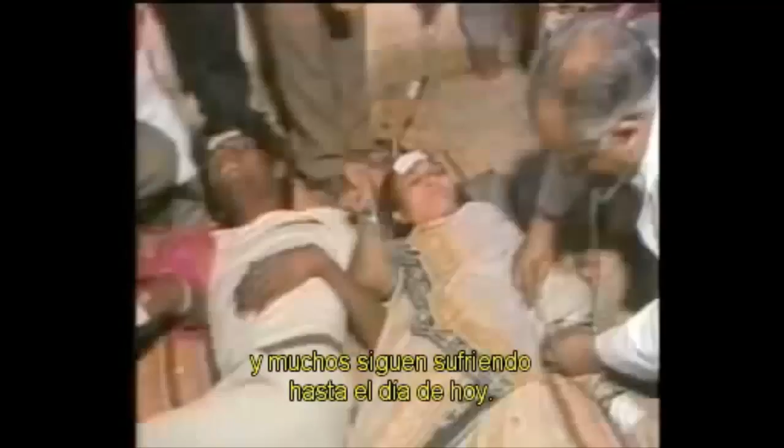Dennis Hendershot is an industry consultant in chemical process safety and has toured the now abandoned Bhopal accident site. Water got into the storage tank somehow. Water reacted with the methyl isocyanate, causing the release, which killed thousands of people. Thousands more died in the aftermath of Bhopal, and tens of thousands continue to suffer today.

But Bhopal also brought about change. Bhopal totally changed the understanding of potential process safety hazards in the chemical industry. Bhopal spurred Congress to require new OSHA and EPA regulations covering chemical process safety. And Congress established the CSB to independently investigate chemical accidents. There have been many positive changes in chemical industry process safety since 1984, when the Bhopal nightmare occurred.

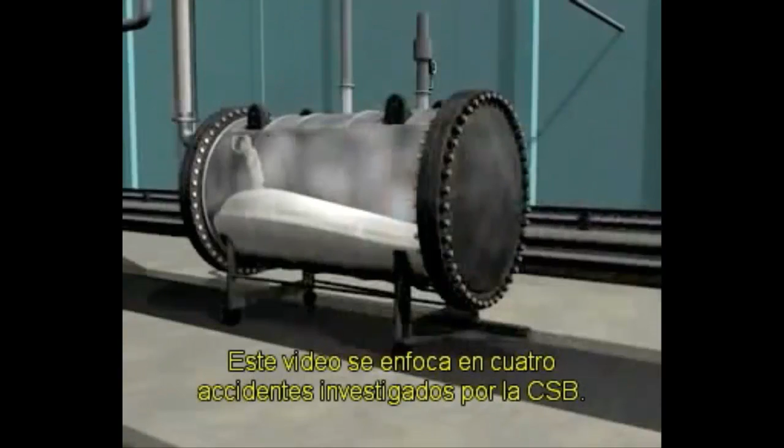But the CSB has found that accidents involving reactive chemicals still occur all too frequently and often with tragic results. This video focuses on 4 major accidents investigated by the CSB, accidents that demonstrate what happens when reactions run out of control, resulting in fires, explosions, and toxic releases that cause death, injury, and environmental damage.

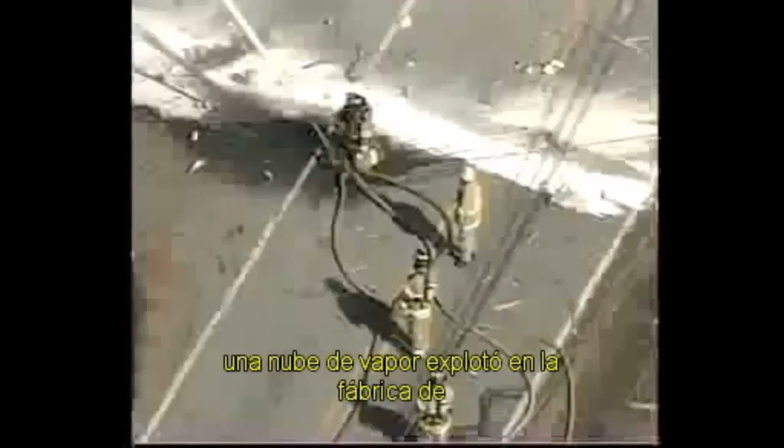Such an accident unfolded on the morning of January 31, 2006, when a vapor cloud exploded at the Synthron acrylic polymer manufacturing plant in Morganton, North Carolina. The blast killed 1 worker and injured 14 others. It destroyed the facility and damaged nearby structures. At Synthron, a seemingly minor increase in the size of a production batch led to a catastrophic explosion. It was a tragic example of what happens when process changes are not managed carefully.

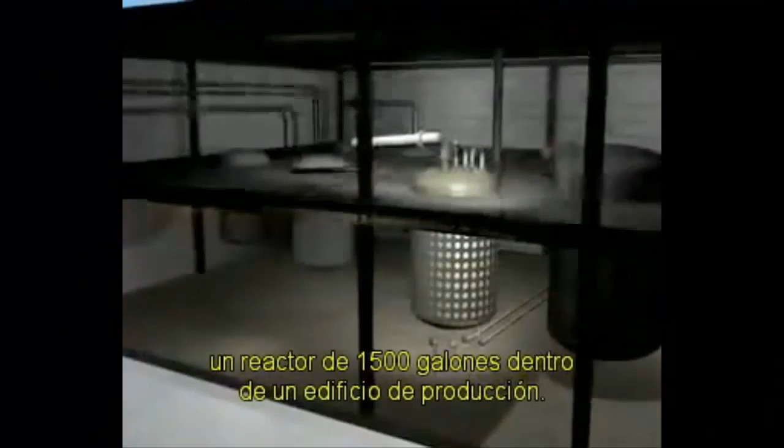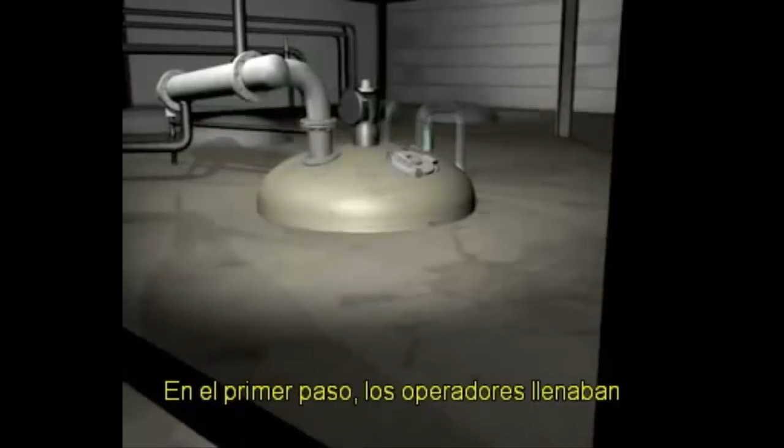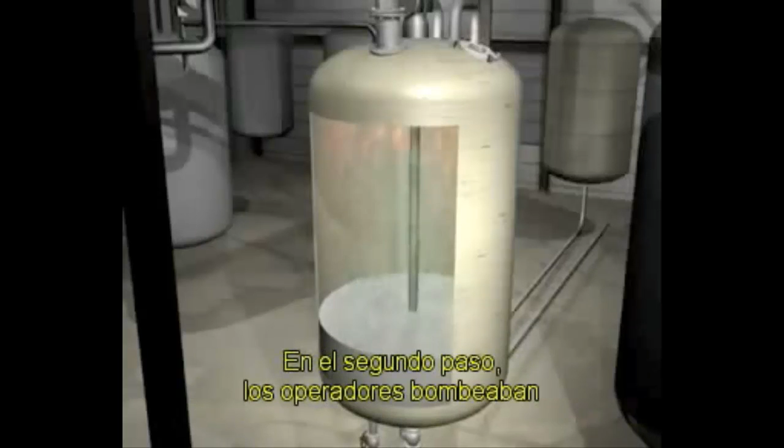Synthron manufactured acrylic polymer coating additives in batches using a 1,500-gallon reactor located inside a production building. The company had produced the polymers for years without serious incident, typically using a 2-step process. In the first step, operators would partially fill the reactor with acrylic monomer and solvent, warm the vessel with steam, and then initiate and run the reaction for up to several hours. Later, in a second step, operators would gradually pump in the remaining acrylic monomer and continue the reaction until the vessel was nearly full of product.

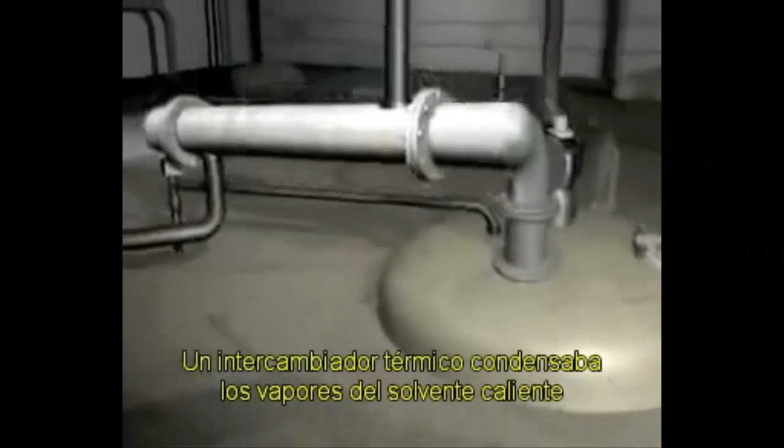Both steps of the reaction generated heat, causing the solvent to boil. An overhead heat exchanger condensed the hot solvent vapors and sent cooler liquid back into the reactor, keeping the temperature and the reaction under control.

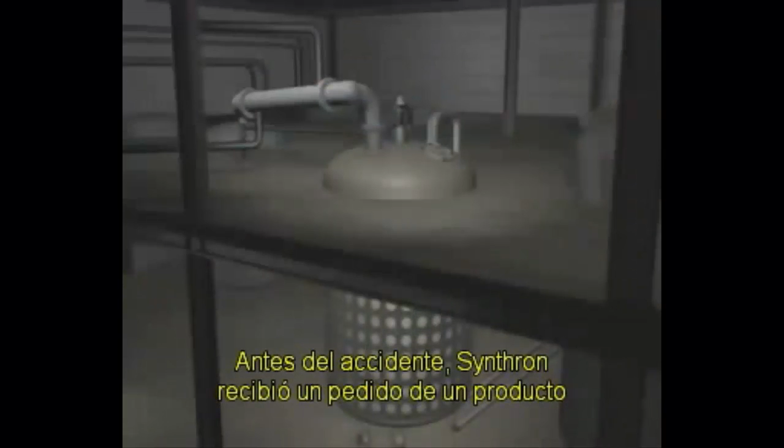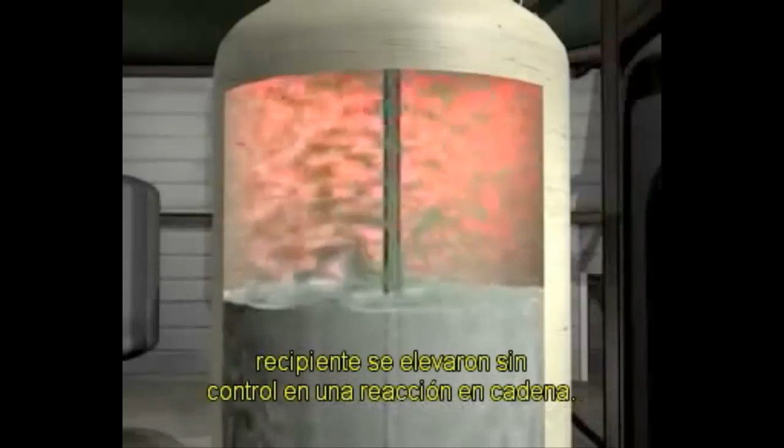Shortly before the accident, Synthron received an order for an acrylic product that was 12% larger than the standard batch size. Rather than fulfilling the order by making 2 smaller batches, managers decided to make a single, larger batch and to add all of the extra acrylic monomer during the first step of the process. But this was a critical mistake. Adding the extra monomer all at once more than doubled the heat released by the reaction. The heat exchanger could not condense the vapor quickly enough, and the temperature and pressure inside the vessel began to rise uncontrollably in a runaway reaction.

The pressure caused the gasket on a hatch to fail, releasing flammable solvent vapor into the building. Employees heard a loud hissing sound, saw the escaping vapor, and fled the building. 4 workers gathered outside a doorway, where they were joined by the plant superintendent and the plant manager. One of the operators went back inside the building in an attempt to send emergency cooling water to the reactor. But it was too late. The operator returned to his companions outside.

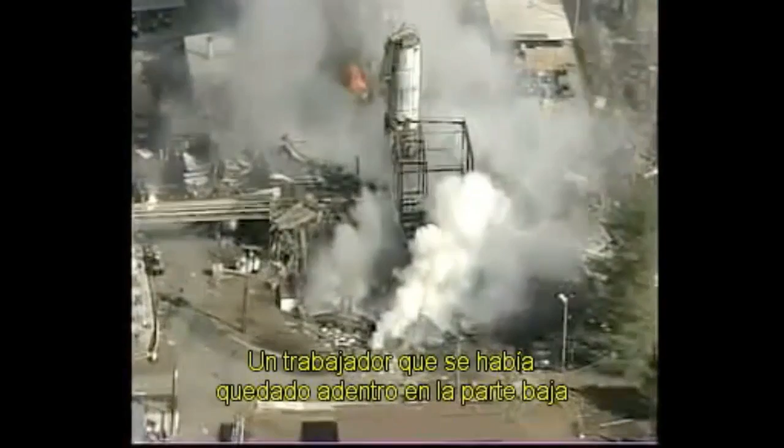Seconds later, the solvent vapor in the building exploded. A worker who had remained inside the lower level of the plant was fatally burned, and 14 others were injured. The building was destroyed. The Synthron accident underscores the need for well-rehearsed evacuation plans. Furthermore, it's critically important for companies to carefully review the effects of making even small changes to reactive process conditions.

Anytime you are rearranging molecules, you have reactive chemistry, and the potential for a reactive chemicals accident is possible. Dr. Daniel Crowl is a chemical engineering professor and process safety expert. If you don't mix the raw materials properly, if you add them in the wrong order, if you add the wrong materials into your process, you will lose control of the mass.

In 2002, the CSB completed a comprehensive study of reactive chemical hazards, issuing key safety recommendations to OSHA and the EPA, as well as trade and industry groups. A number of the recommendations have yet to be adopted. The report identified 167 serious accidents involving uncontrolled chemical reactions in the United States over 2 decades, causing 108 deaths and hundreds of millions of dollars in property damage. More than half involve substances not covered under current federal process safety regulations.

Between 2002 and 2007, the CSB investigated 10 additional serious reactive accidents and identified many others that caused deaths, injuries, evacuations, or property damage. Just because the initial screening method says you probably don't have a clearly identifiable reaction hazard, that doesn't mean that that reaction hazard doesn't exist. And you probably need to look into your chemicals and their properties and their reactive nature a lot more thoroughly than you think you need to.

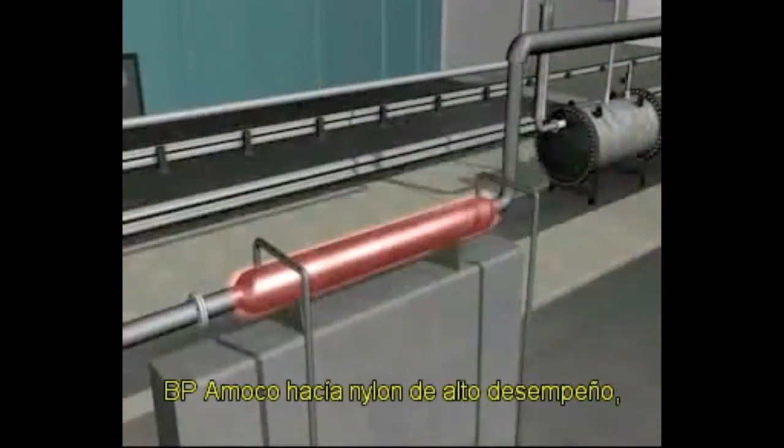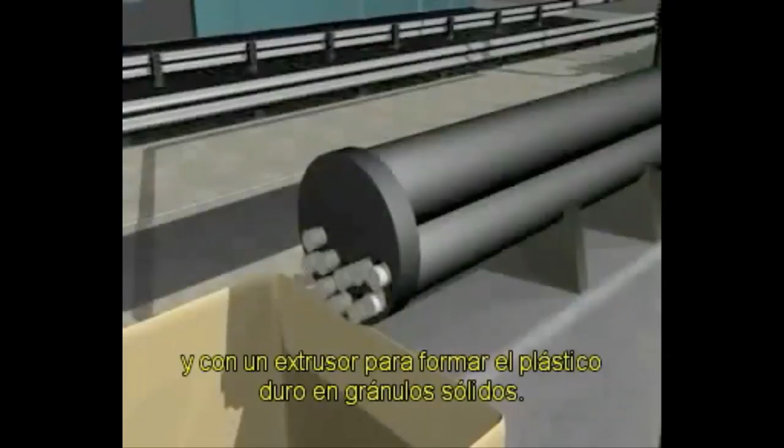BP Amoco made high-performance nylon by pumping raw materials through a heated reactor and then using an extruder to form the hot plastic into solid pellets. During the first 50 minutes of startup, plastic considered to be unusable was diverted away from the extruder to a 750-gallon waste tank. Steam and gases escaped through a vent in the waste tank, preventing any accumulation of pressure inside.

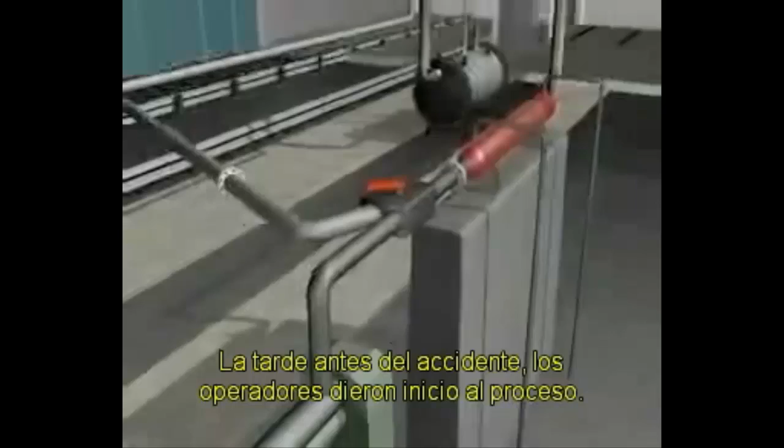The contents of the tank were allowed to cool down over a period of hours. Workers then opened the cover to remove the waste plastic. On the afternoon before the accident, operators began to start up the process. But there was a mechanical failure in the extruder.

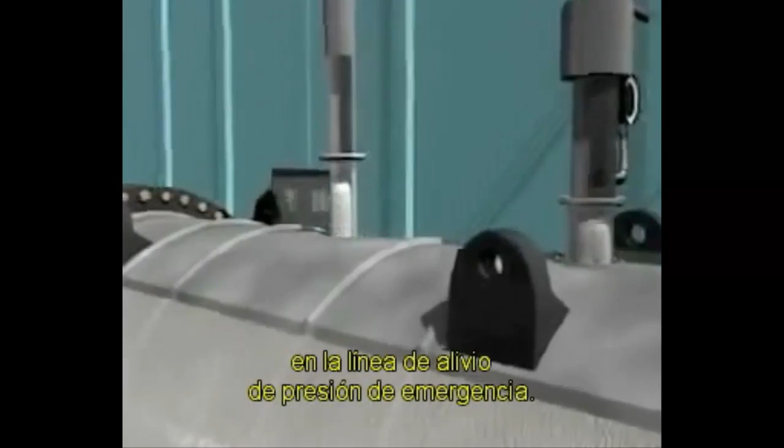While the operators tried unsuccessfully to fix the extruder, the hot plastic continued flowing into the waste tank for an unusually long time. Supervisors eventually aborted the startup, but by then the waste tank had already overfilled with molten plastic. The excess plastic clogged the vent line and the emergency pressure relief line. With the lines and pressure gauge now sealed off, workers would have no reliable way of determining whether the tank

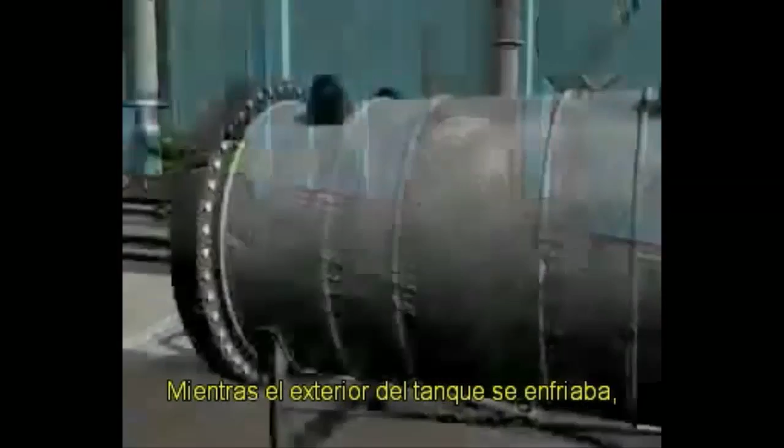was under pressure. As the outside of the waste tank gradually cooled, a hard plastic layer several inches thick formed around the inside surface of the tank. But closer to the center, the plastic still remained hot and molten. Unknown to workers, a slow decomposition reaction was occurring inside the molten plastic. Over a period of hours, the hot plastic molecules were breaking down, forming gas bubbles and causing a dangerous buildup

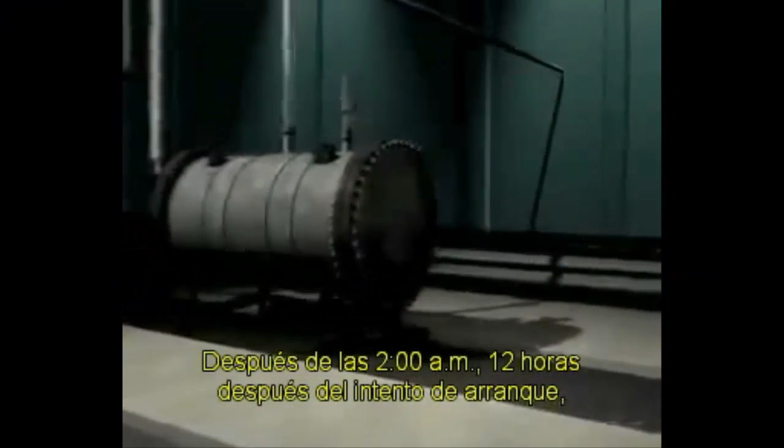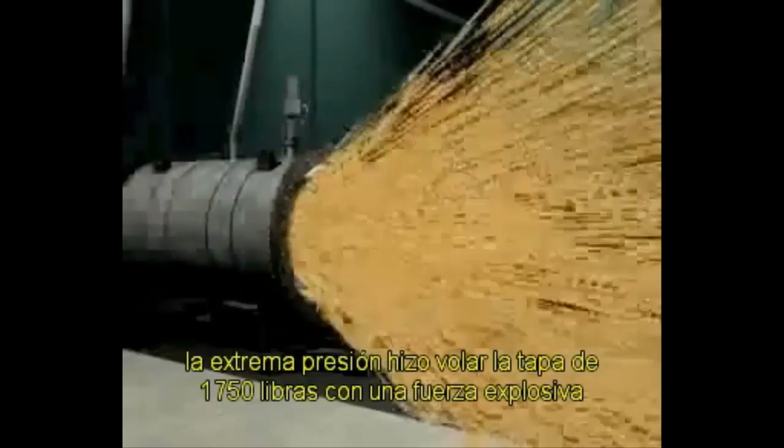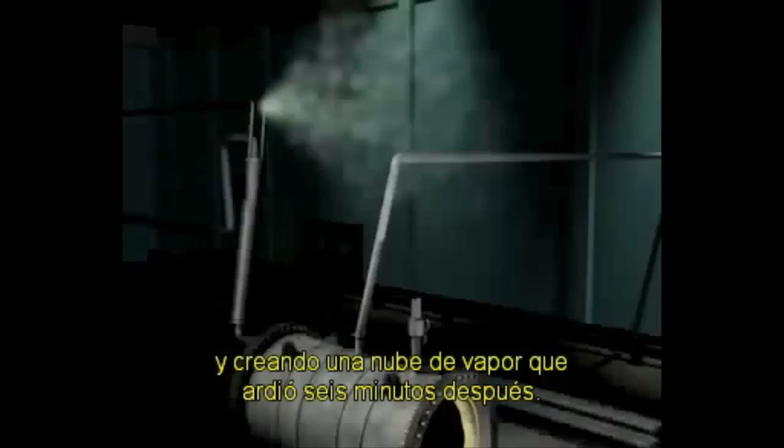of pressure. Just after 2 a.m., 12 hours after the startup attempt, 3 night shift workers approached the waste tank to clean it out. The workers began to unbolt the cover of the tank. After they had removed half the bolts, the extreme pressure blew the 1,750-pound cover off the tank with explosive force and ejected hot plastic over a wide area. The waste tank recoiled backward, breaking hot oil pipes and creating a vapor cloud which ignited 6 minutes later.

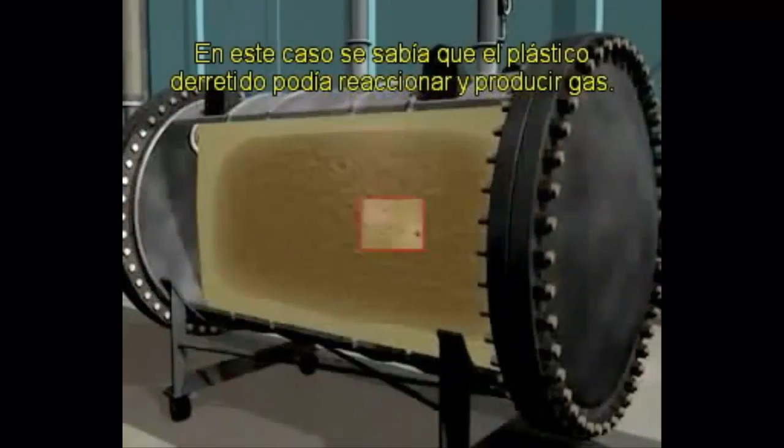2 of the maintenance workers were killed instantly when the tank cover blew off. The third was pronounced dead on arrival at a hospital. This accident shows how even slow chemical reactions that don't produce any heat can still be hazardous. In this instance, company researchers knew that molten plastic could react to produce gas, but that information was not sufficiently incorporated in the design of the process or communicated to workers.

I think that is one of the main issues. And it's not so much that nobody was aware of that information, but rather that the people who were actually operating the process didn't have the information or didn't have access to it. But somebody, somewhere, even within the same organization, often had that information. So a lot of the problem, I think, is education and awareness.

If you were never in an explosion, it's a horrible feeling. You'll never forget it. Robert Oliver was a victim of a reactive chemical accident at Morton International in 1998 in Paterson, New Jersey. He and other survivors spoke about the human impact of such accidents at a CSB public hearing on reactive hazards in 2002. I hope this would help not only the United States, but the whole world to be more careful or get more insight on the chemical that they're working with.

I can remember when the fireball hit. I can remember being blown through the air. I can remember the fire. I remember the pain. I lost track of time. I went blank or something. I don't know how I got out of that area. If my coming here today should save one life or stop somebody else from going through the nightmare I have been living, then it's worth coming here and going through the pain of living it again. Thank you. The CSB's 2002 study found that over 90% of serious reactive chemical accidents involve hazards that have already

On April 12, 2004, the MFG chemical plant in Dalton, Georgia, experienced a runaway chemical reaction. It caused the release of highly toxic vapors into a residential community. The CSB determined that the accident occurred because MFG did not safely scale up a chemical reaction from the laboratory to a large production vessel. MFG was contracted to manufacture 35,000 pounds of a plastics additive called triallyl cyanurate, or TAC.

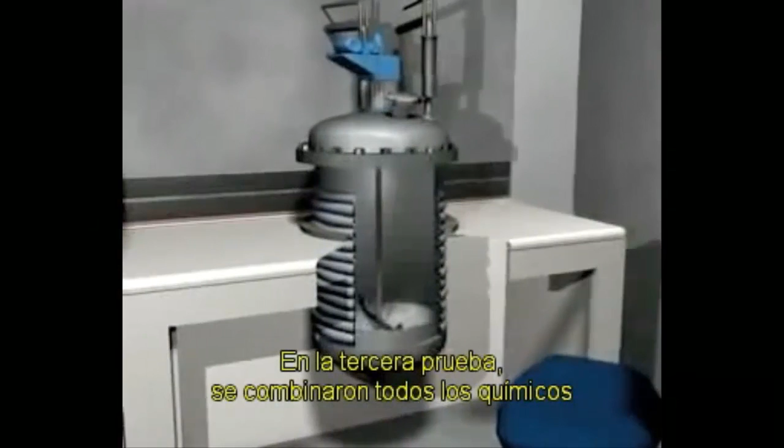The company produced 3 trial batches of TAC by reacting allyl alcohol and cyanuric chloride inside a small 30-gallon test reactor. In the first 2 tests, operators controlled the exothermic or heat-producing reaction by adding one of the raw materials in small portions. In the third test, all of the chemicals and a catalyst were combined in the test reactor at one time, which was the procedure that MFG later decided to use when scaling up to full production.

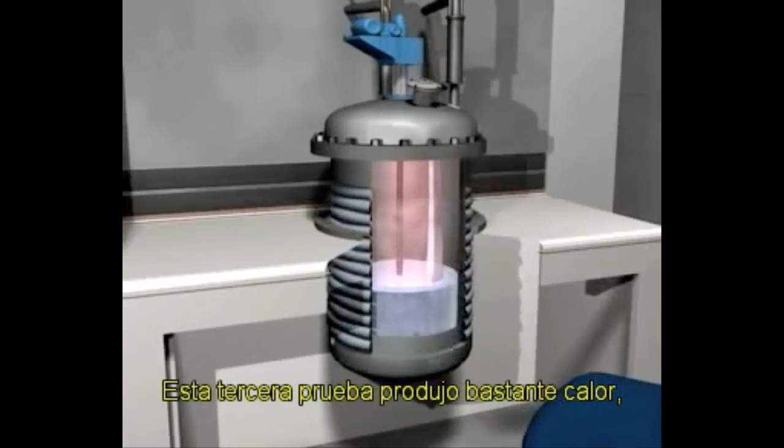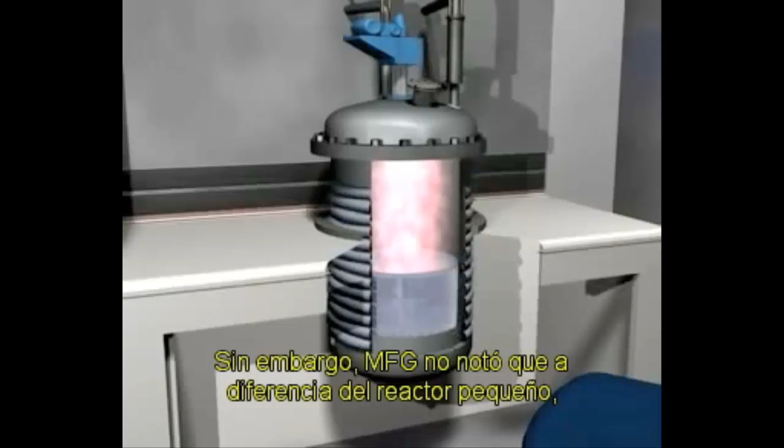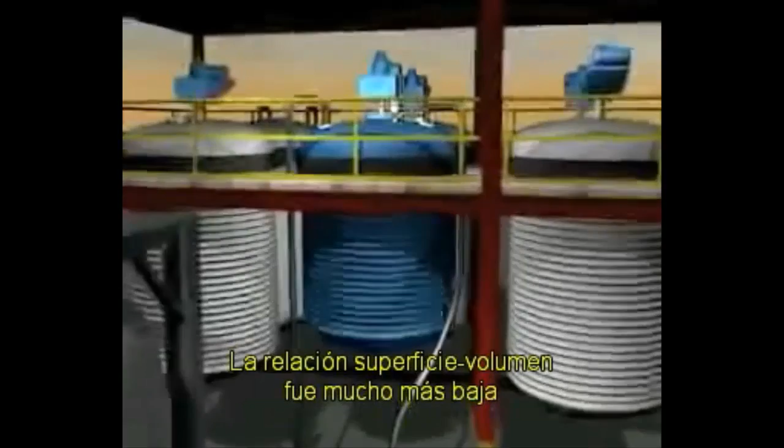This third test produced significant heat, but the water cooling jacket around the small vessel was able to keep the temperature low and control the reaction. However, MFG did not realize that compared to the small test reactor, it would be far more difficult to control the temperature in the 4,000-gallon production vessel. The surface area to volume ratio was much lower in the production vessel than in the test reactor.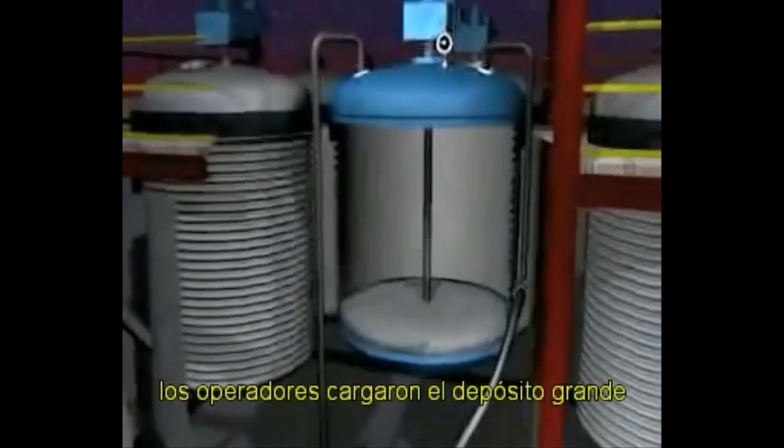Starting the production process for the first time, operators loaded the large vessel with all of the cyanuric chloride powder and the catalyst. They then added all of the allyl alcohol and began mixing the chemicals. To control the temperature, MFG had rented a portable chiller and connected it to the cooling jacket on the vessel.

But as soon as all of the raw materials were combined, the reaction began producing heat faster than the cooling system could remove it. The temperature increased uncontrollably, and with all of the raw materials already in the vessel, nothing could be done to control the reaction. The pressure inside the reactor climbed rapidly as the mixture heated.

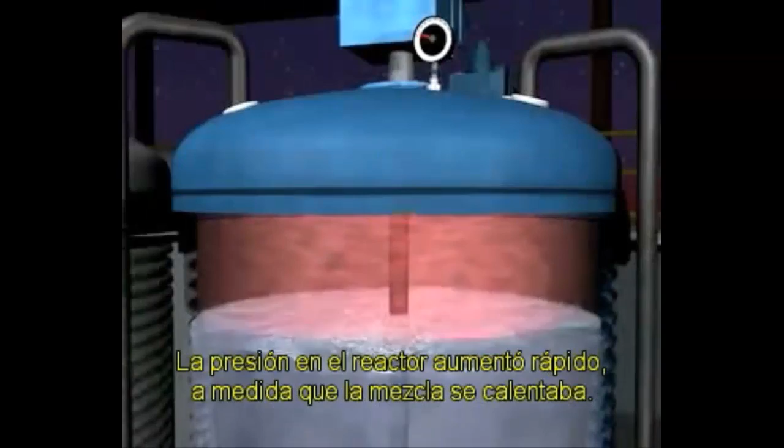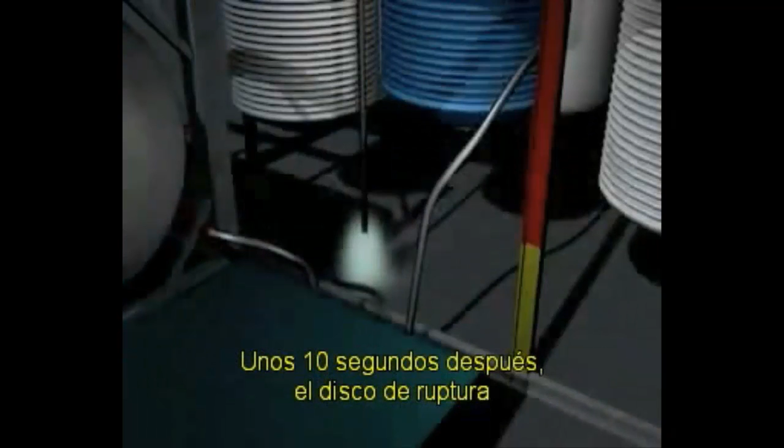Suddenly, a gasket blew out, releasing toxic allyl alcohol and allyl chloride vapors into the atmosphere. About 10 seconds later, the emergency pressure relief rupture disc burst open, releasing more vapor. Unable to slow the reaction or contain the release, the operators were forced to evacuate to a safe location upwind.

The toxic vapors quickly spread into the residential neighborhood east of the facility. Authorities ordered the evacuation of more than 200 families, but the town had not trained or equipped its emergency responders for such an accident. 154 people had to be decontaminated, including 15 police and ambulance personnel. This accident emphasizes the need for emergency responders to be fully prepared for a toxic chemical release.

The CSB found the company could have prevented the accident by better understanding the chemical process and knowing how to prevent a runaway reaction. You don't want to be learning about chemical reactions in a 5,000-gallon vessel. You want to learn about it in a small vessel in the laboratory and understand what's going on so that by the time you get to the large manufacturing vessel, you already know those things. You don't want to get surprises on a large scale.

A large 20,000-gallon reactor will run away a lot faster than a 1-gallon reactor that you're using in the laboratory. And somehow human nature is to believe that larger is slower, and in the case of reactive chemicals, a larger chemical reactor will actually run away a lot faster than a smaller chemical reactor. Chemical reactions where high temperatures cause decomposition can produce powerful explosions. Few people realize how much destructive energy can be released, as in the following accident at a Mississippi chemical plant.

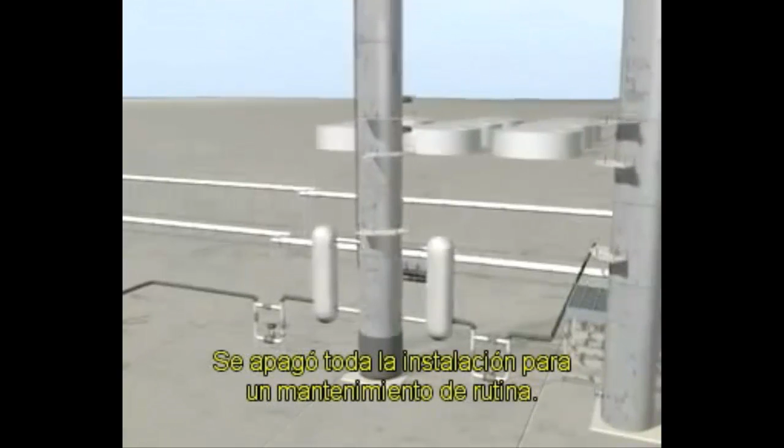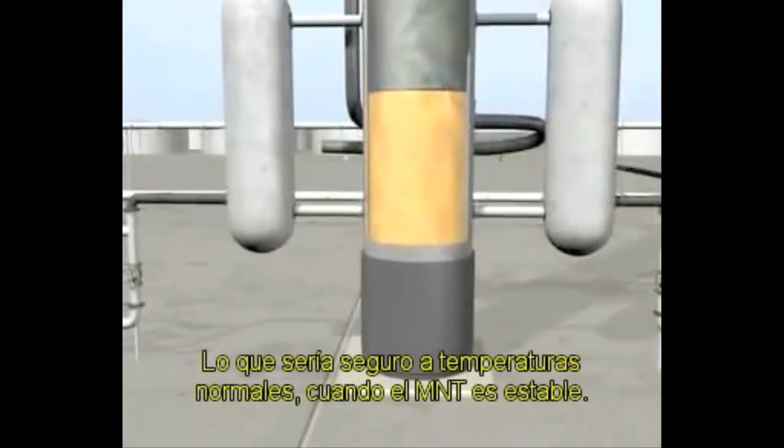On October 13, 2002, an explosion tore apart a 145-foot distillation tower at the First Chemical Corporation in Pascagoula. 3 distillation towers at the facility separated and purified mononitrotoluene, or MNT, which is used in the manufacture of dyes and agricultural chemicals. The entire facility was shut down for routine maintenance. Plant operators decided to leave 1,200 gallons of MNT inside one tower during the shutdown. This would be safe at normal temperatures where MNT is stable.

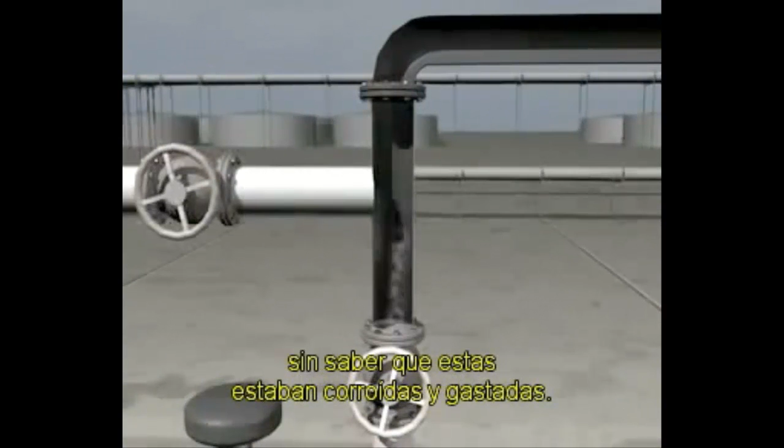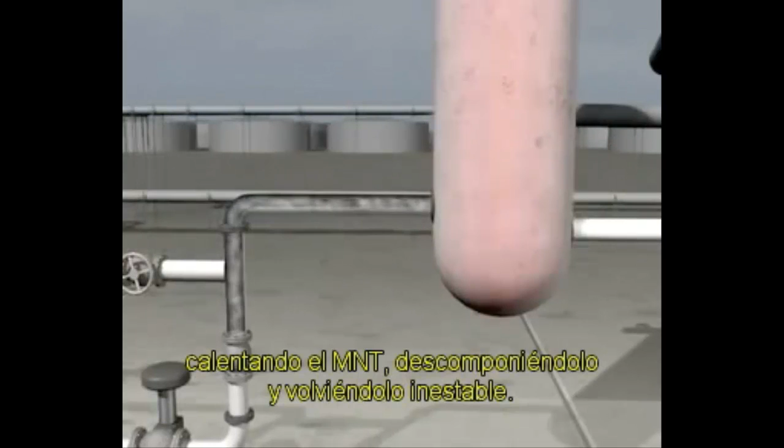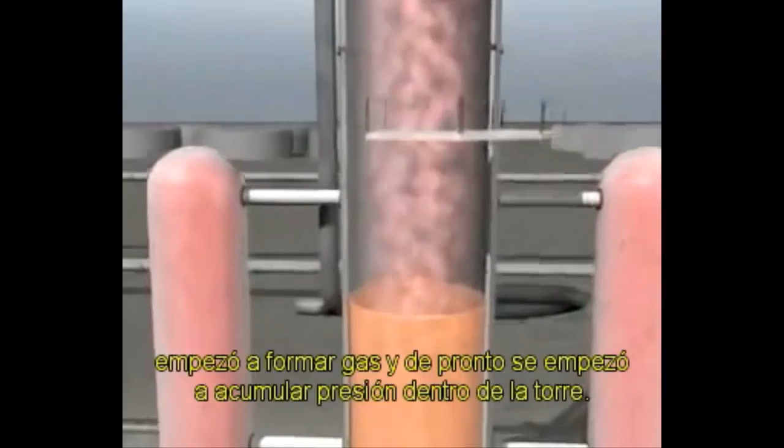The heating was shut down on the 2 reboilers by closing the steam supply valves. But unknown to operators, these valves were corroded and worn. Steam leaked into both reboilers over a number of days, heating up the MNT, causing it to break down and become unstable. On the morning of the accident, the temperature inside the tower reached 450 degrees Fahrenheit. A dangerous runaway reaction began, rapidly forming gas and suddenly building up pressure inside the tower.

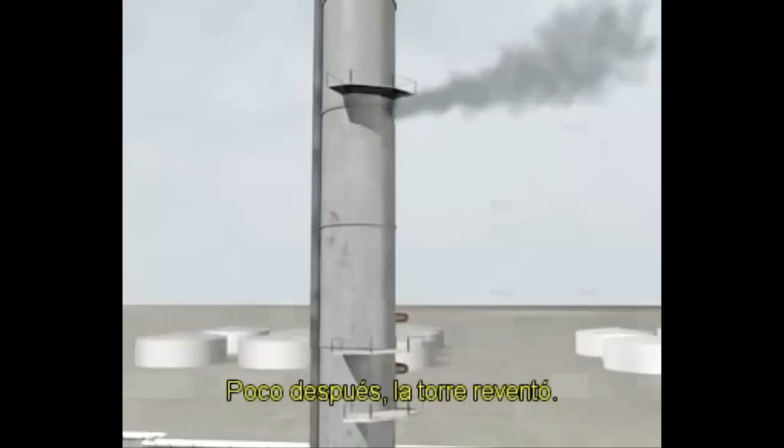The tower began to rumble, and employees saw material venting quickly from a breach high in the tower. A short time later, the tower ruptured. The violent explosion propelled the top 35 feet of the tower well beyond the plant site. Another piece of the tower sailed 500 feet and hit a storage tank of MNT, setting it ablaze.

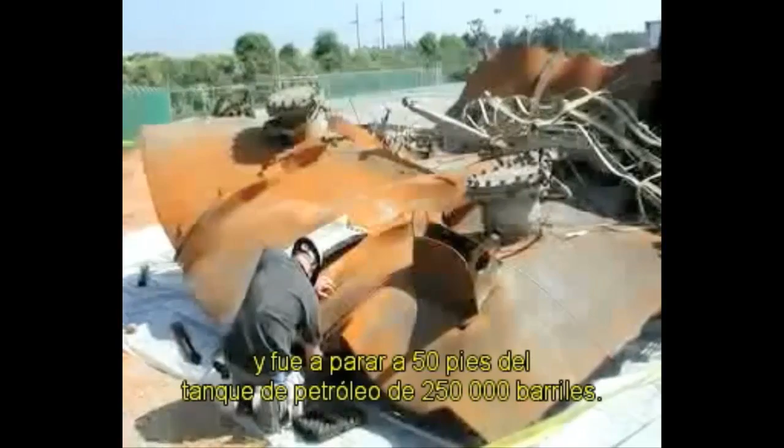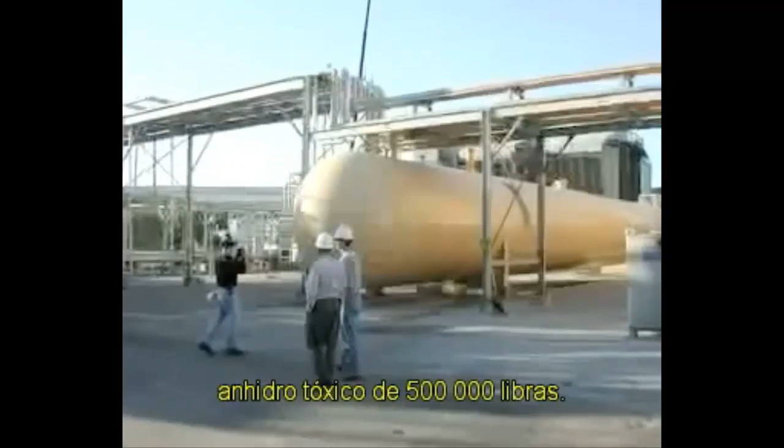A 6-ton piece of the tower sidewall flew 1,100 feet and came to rest just 50 feet from a 250,000-barrel crude oil storage tank. A piece of shrapnel nearly hit a 500,000-pound tank of toxic anhydrous ammonia. Metal packing covered in flaming chemical residue ejected from the tower and rained down across the facility and neighboring plants. The explosion knocked down 3 operators who had taken shelter just inside the control room door.

As the CSB found in its 2002 study, and in 10 subsequent investigations, reactive accidents can have serious and tragic results. To prevent these accidents, companies should identify and thoroughly evaluate reactive hazards in their processes. Appropriate emergency pressure relief systems and other design safeguards need to be in place. Companies should also develop effective operating procedures and training programs, and carefully manage any changes to existing processes. Finally, facilities need to plan for possible accidents, including evacuation drills and emergency response exercises.

The most important thing to managing reactive chemistry hazards is that you have to have a thorough and complete understanding of your chemistry under design conditions and also under all foreseeable abnormal conditions. The main message I have is that we cannot avoid reactive chemical hazards. However, chemical plant accidents involving reactive hazards are unacceptable. The technology and the management systems do exist to produce these products safely.

Much progress has been made in chemical process safety since the Bhopal accident in 1984. But deaths and injuries continue to occur from uncontrolled chemical reactions, and significant gaps remain in federal regulations and industry programs to control reactive hazards. It's time to redouble our efforts to prevent these tragedies.